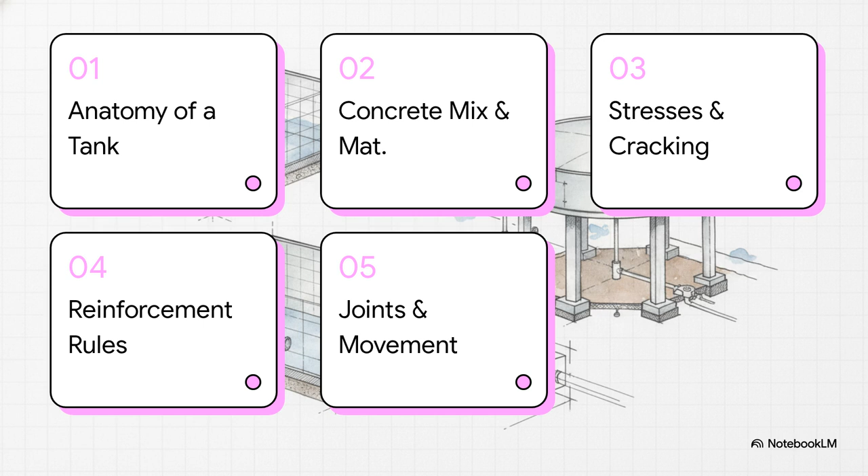Here's our game plan for today: anatomy of a water tank, concrete mix and materials, permissible stresses and cracking, reinforcement and detailing rules, and finally, movement and construction joints. Starting off with Section 1, the anatomy of a water tank. Now, to actually memorize these abstract IS 3370 code provisions, we really need to visually anchor them to a physical structure first, right? Because if you can see the tank in your mind's eye, the maths just makes so much more sense.

Take a look at this elevated Intze-type tank. We've got the main top container holding the water, and that's supported by horizontal ring beams that are actively fighting off that massive outward hoop tension. And right below all that is the staging, basically the system of vertical columns and braces. Here's a crucial tip: because these structures are so top-heavy, the IS 1893 seismic rules treat them as a two-mass model. That means they account separately for the impulsive mass, the water moving with the tank, and the convective mass, which is the sloshing waves.

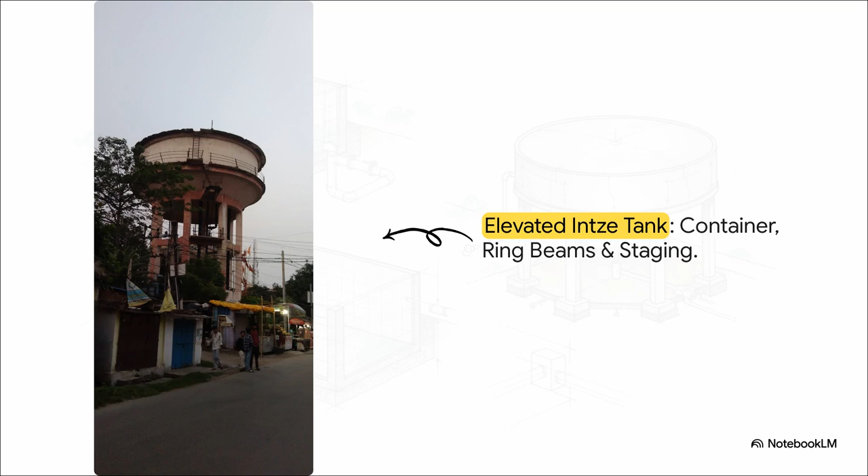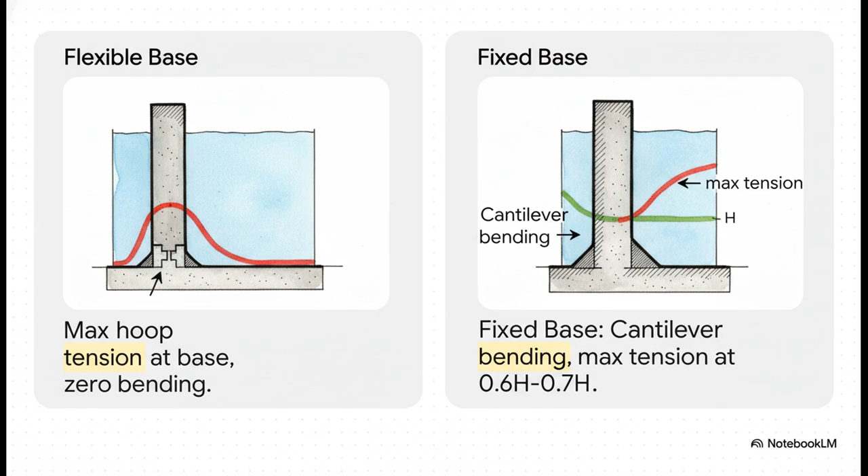All right, moving on to a classic exam concept. You really need to know how the base connection of that cylindrical wall changes the internal forces. If the base is flexible or sliding, your maximum hoop tension is right down at the bottom, and you've got zero bending moment. But if that base is fixed or restrained, it acts just like a cantilever. A bending moment develops at the base, and your maximum hoop tension shifts upwards, to about 0.6 to 0.7 times the height from the top. Keep that upward shift in mind. It's a huge detail.

Moving right along to Section 2, concrete mix and materials. So let's see how all of this builds into the actual physical materials we use. Water tanks face what the code calls a severe exposure condition, and that means the rules are incredibly strict about what gets dumped into the concrete mixer. Take a mental snapshot of this table. These are your first principles for the mix. Notice how the requirements relentlessly tighten up.

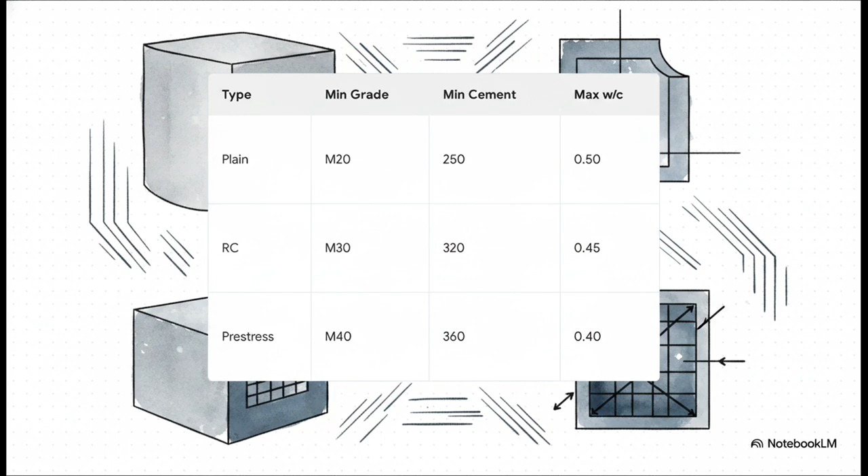For plain concrete, you need a minimum of M20 grade with 250 kilograms per cubic meter of cement and a max water-to-cement ratio of 0.50. Step it up to reinforced concrete, and it jumps to M30, 320 kilograms of cement, and a tighter 0.45 ratio. And for pre-stressed, it goes all the way to M40 grade, 360 kilograms of cement, and a super tight 0.40 ratio.

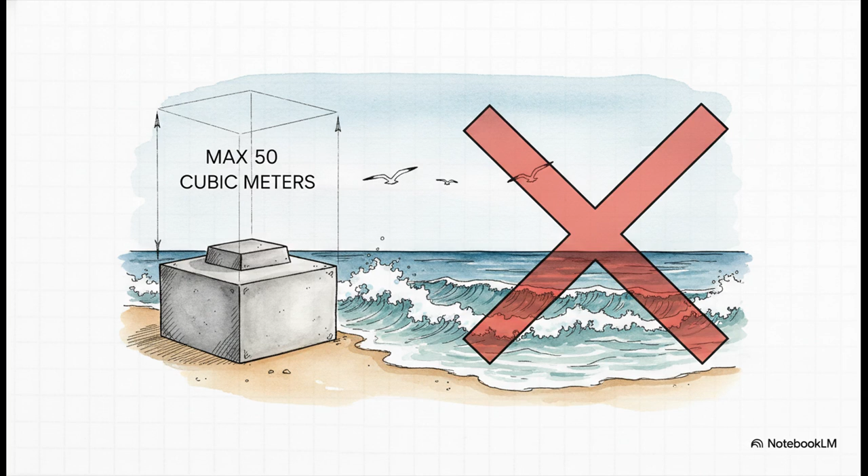But watch out for this exception. Competitive exams love testing exceptions to the standard M30 rule. You are permitted to use M25 grade for reinforced concrete, but only for small capacity tanks up to 50 cubic meters. And the real kicker is that they absolutely cannot be in coastal areas. Do not let that detail slip past you.

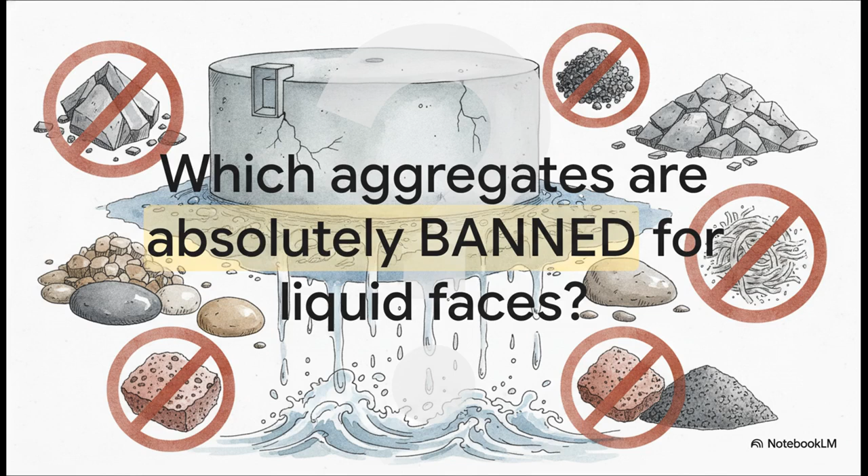Let's test your recall with a direct mock exam question. Do you know which specific aggregates are 100% banned by the IS code for liquid retaining faces? If you guessed porous aggregates, you nailed it. Under no circumstances can you use slag, crushed overburnt brick or tile, bloated clay, or sintered fly ash. And it makes total logical sense. Using porous, sponge-like materials on a structure whose only job is to stay liquid tight completely defeats the purpose.

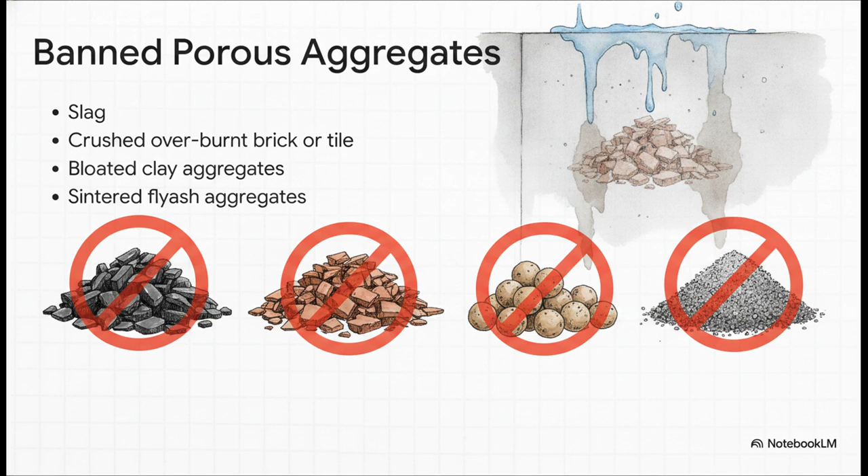Let's pivot to Section 3, permissible stresses and cracking. Let's look at the structural math, the critical limits that tell us how to handle water pressure, temperature stresses, and the ever-present risk of cracking. Historically, IS 3370 relied heavily on the working stress method, or WSM, which strictly limits stresses to prevent cracks from ever forming. But today, the limit state method, or LSM, is highly utilized. LSM allows some higher stresses, but it tightly, empirically, controls the calculated surface crack width.

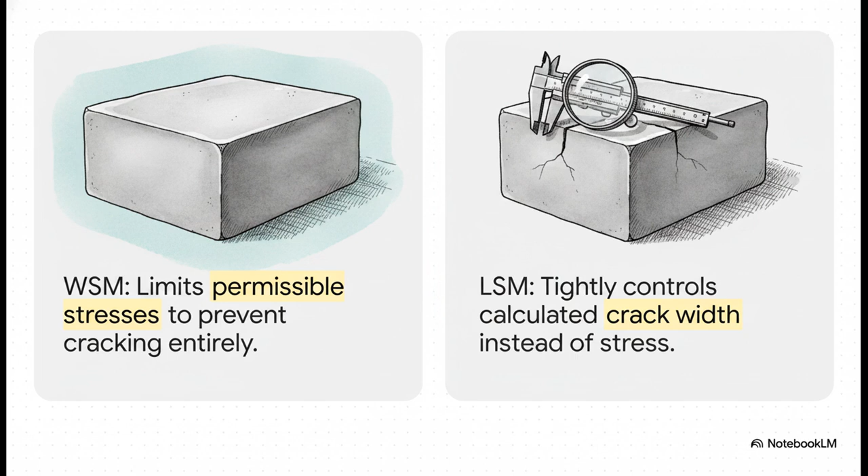Under LSM, liquid load is treated with a load factor of 1.4, so it essentially acts as a highly controlled dead load, simply because its maximum volume is capped by the overflow pipe. Because we're trying so hard to control those cracks, the allowable stresses in the steel reinforcement are much lower here than in your standard IS 456 building codes. Check this out.

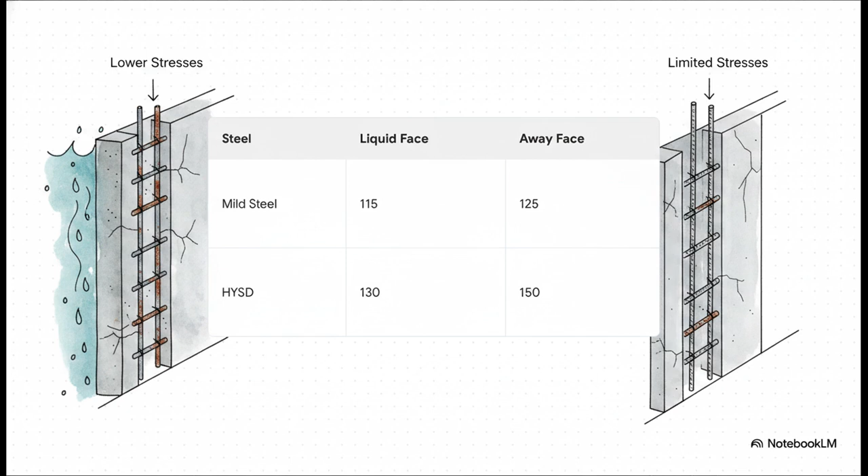On the liquid retaining face, mild steel is strictly limited to 115 newtons per square millimeter, and HYSD bars are capped at 130. And even on the dry face, away from the liquid, HYSD is still maxed out at 150. Basically, we are deliberately understressing the steel so the surrounding concrete doesn't stretch and crack. Make sense? So the absolutely crucial takeaway here is this exact number, 0.2 millimeters.

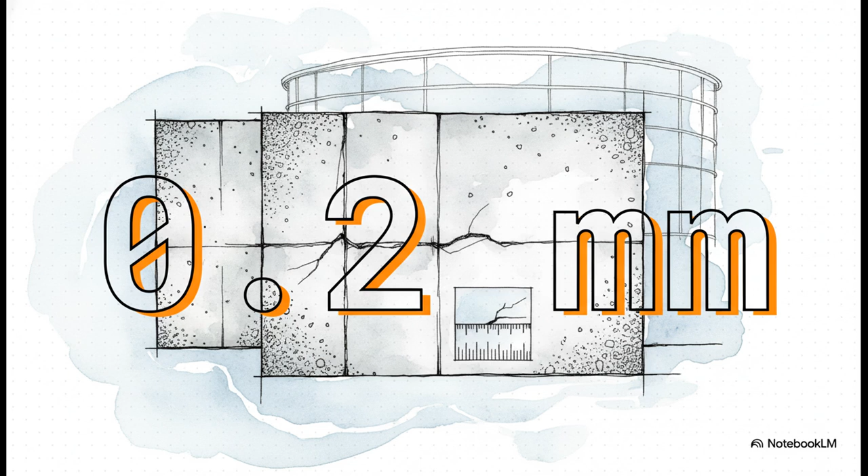Listen up. Under the limit state method, for standard severe exposure conditions in a liquid retaining structure, the maximum calculated surface crack width must never, ever exceed 0.2 millimeters. Seriously, etch that number right into your brain. But it actually goes a bit deeper than that, depending on the structure's tightness class.

Class 1, where maybe a small leak or a little surface stain is okay, holds steady at that 0.2 millimeter limit. Then you have Class 2, where appearance really matters and we only want minimal leaks. That requires 0.2 millimeters with a liner, or it drops down to a stricter 0.1 millimeter limit.

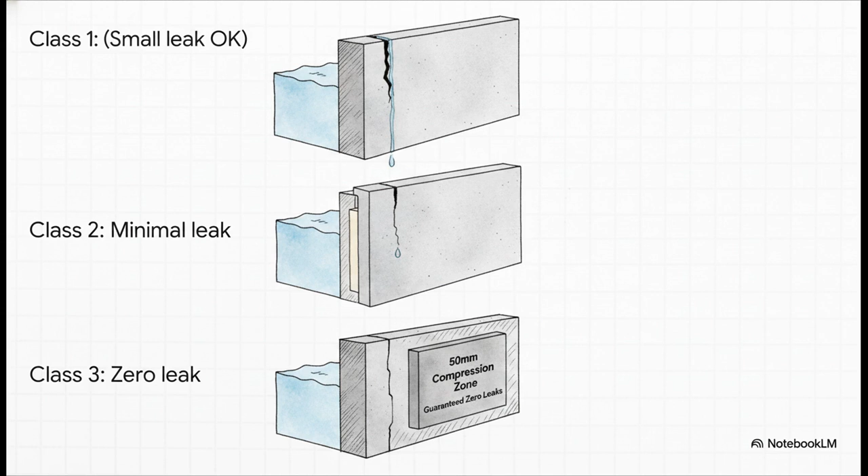And then there's Class 3. This is where absolutely zero leakage is tolerated. Class 3 demands a 0.1 millimeter crack limit, and it has to come with a guaranteed 50 millimeter compression zone inside the concrete section itself.

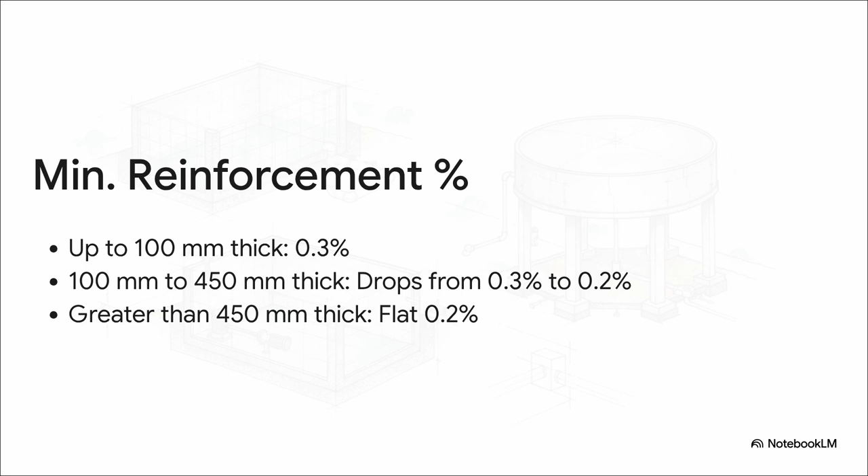To fight back against shrinkage and temperature variations, we need minimum reinforcement, and it actually operates on a sliding scale. Think of it like this. For thin members up to 100 millimeters thick, you need 0.3% of the concrete area. As that thickness grows from 100 up to 450 millimeters, the requirement drops linearly down to 0.2%. And for anything massive, over 450 millimeters thick, it just stays flat at 0.2%.

Oh, and here is a totally non-negotiable detailing rule you just have to remember. If your concrete wall or slab thickness is 200 millimeters or greater, you cannot, I repeat, cannot just bunch all your steel in the middle. The reinforcement absolutely must be placed in 2 separate layers, with one near each face. This is critical to effectively distribute those stresses and keep surface cracking under control.

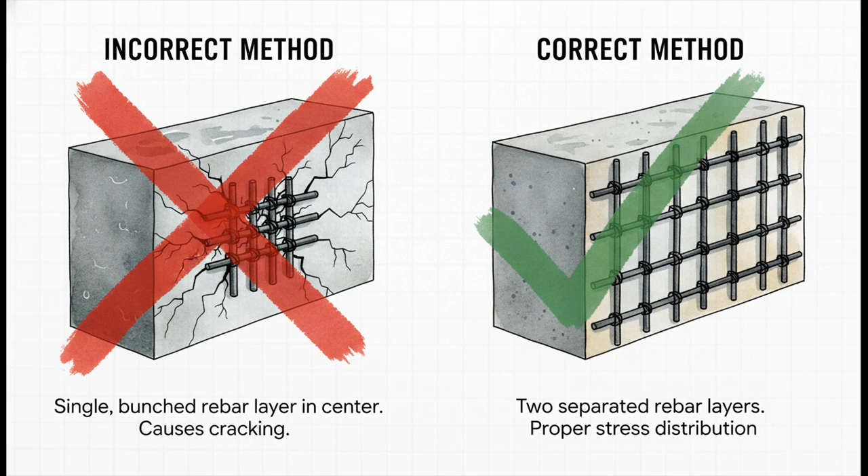Almost there. Section 5, movement and construction joints. Finally, let's talk about joints. As you know, concrete isn't just a static block. It shrinks as it dries out, and it expands when the temperature rises. It needs room to breathe and flex. If we don't control exactly where it moves, well, it's going to crack right where we don't want it to.

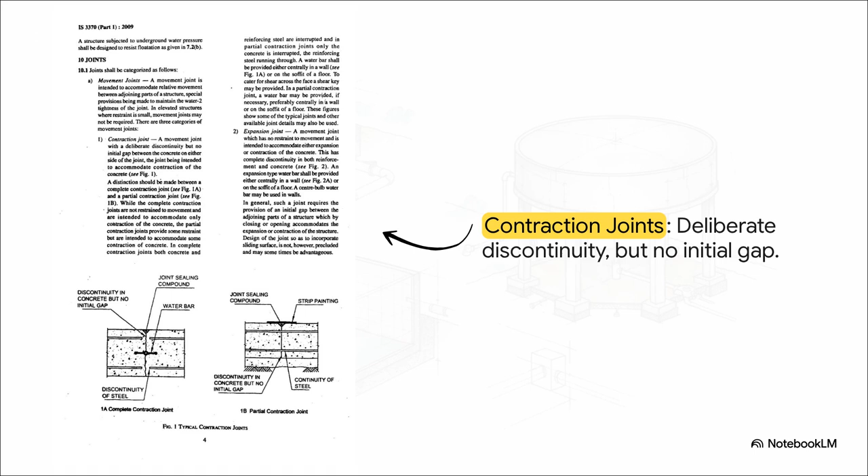Now, what's really interesting about this slide is the visual definition of a contraction joint. Look closely. It is a deliberate discontinuity in the concrete, often with a water bar placed right in the center, but there is absolutely no initial gap between the concrete faces. None. It's poured completely flush, and it's intended to only open up when the concrete shrinks and pulls away from the joint. This is a classic exam trap, guys. Do not confuse this with an expansion joint.

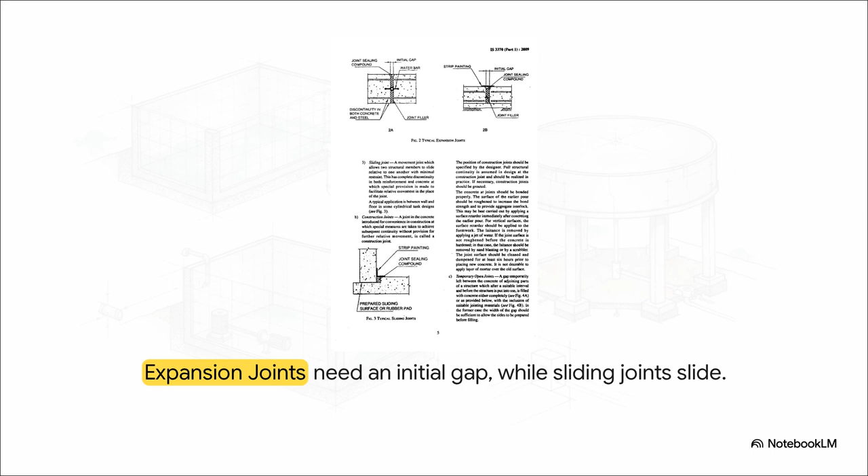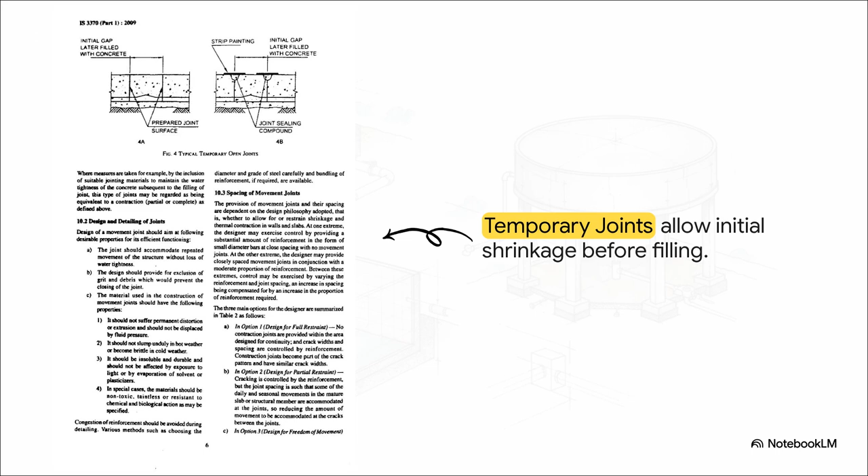And our last joint type, temporary open joints. Honestly, this is such a clever construction trick. A gap is intentionally left open between the concrete pours. You just wait, letting the early age heat of hydration and all that initial drying shrinkage dissipate and pull the concrete apart naturally. Only then, right before the tank actually goes into service, do you fill that gap with concrete or mortar. It basically bleeds off massive amounts of internal stress before the tank ever holds a single drop of water. So what does this all mean for your exam?

Well, that brings us to our final revision test to close out this explainer. Here we go. What is the absolute maximum crack width allowed for a tightness class 2 structure? And what specific structural guarantee absolutely must accompany it? Think about it for a second. If you instantly recalled the 0.1 millimeter limit and the mandatory 50 millimeter compression zone, fantastic. Your mental cheat sheet is solid. Just keep reviewing these numbers, visualize the physical structures, and you're going to absolutely master IS 3370.